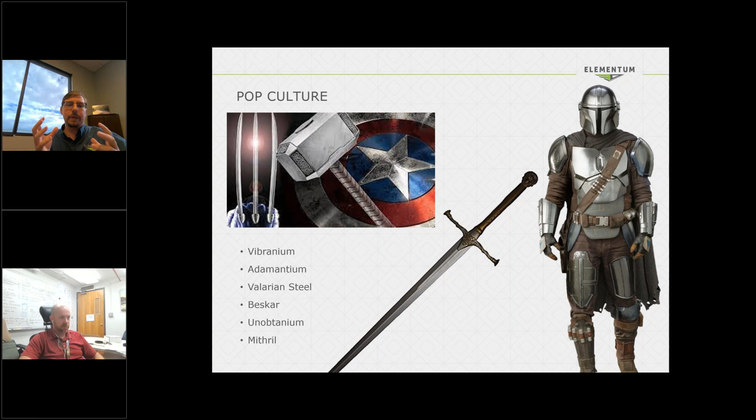And so what is it that really captures the human imagination around these materials, and what helps us define the different stages of human development as part of those materials? If we talk in history, we look back and we say, okay, we have the Stone Age, then the Bronze Age, then the Iron Age, now maybe the Silicon Age that we're in now. Why is it materials really define the different stages of human advancement?

And what is it about that causes, I think, excitement in humans? Even in science, we hear about some of these mythical materials like graphene that's 100 times stronger than steel, and carbon nanotubes that have a higher tensile strength than anything that exists. Why is it then that we don't have buildings made of these materials? Why is it that we don't make suits of armor that are completely impenetrable?

And it really comes down to, if you can't make it into something useful, it doesn't really matter. If we go back to those pop culture references, there isn't a pop culture reference that really talks about a material as just being a material. They always talk about its properties and then where you use it. So, adamantium, it's the claws that are completely indestructible, that are infused with his bones. Or the Valyrian steel is stronger and can cut other swords in half. It talks about the use and the application space.

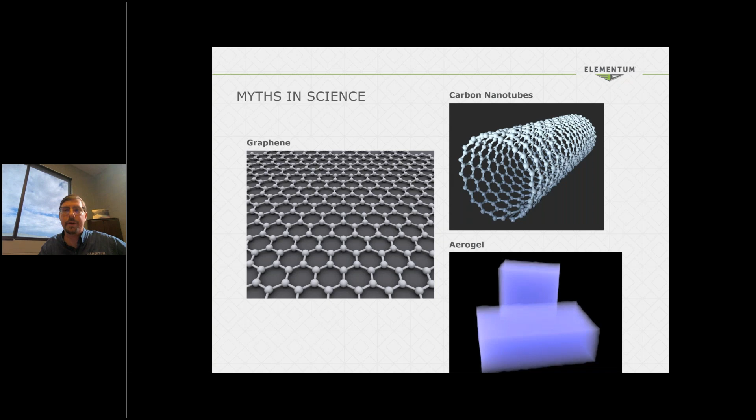And there's really a difference between just being able to address new materials and talk about great new properties in a lab setting versus actually having impact on the culture and on humans and what we do. And that's really where I'm excited about additive manufacturing. Additive manufacturing in particular, I think, is bridging that gap, hence the name of the series that we do here, of bridging the gap between pure developmental science and real usable applications.

Where you can actually take a component made of some brand new material that has properties that have never been seen before, and you can put it into practice in a shorter period of time, and in reality, way faster than it's ever existed before. And that's what personally gets me excited about new materials and additive manufacturing in particular.

When I was doing research in graduate school and really developing new materials there, it was so hard to control and to transfer that knowledge into something that would be useful for industry. Whereas now we're going from a development concept of a new material into production on a component within 2 years, which is an incredibly fast timeline compared to what has happened within human existence in the past. And that's really where I get excited about the new materials that we're looking at.

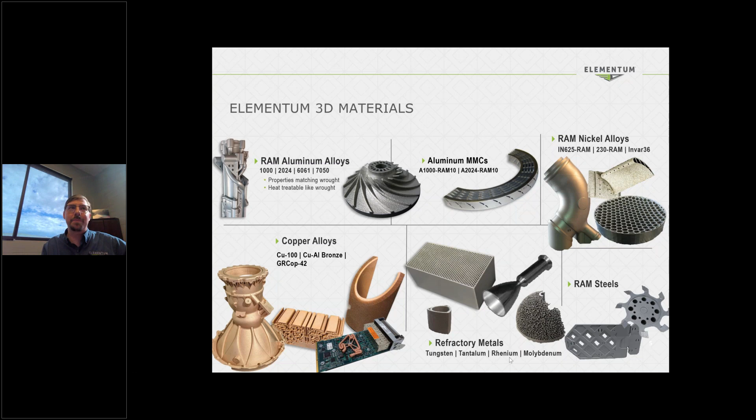And then even in the refractory materials, like rhenium. We've been printing rhenium recently, which if you had told me that we'd be making components out of rhenium and then hot fire testing them within 6 months, if you had told me that 10 years ago, I would have probably told you you're crazy. And so I think that's the really exciting part about additive manufacturing and the new materials that we're bringing to the table. And that's why I'm really excited to introduce the speakers that we have here today.

A little bit about Elementum's relationship with these different people. Elementum has a lot of relationships across the entire industry, but certainly we've been working with these gentlemen quite a bit. Jamie, we've been working with 6K products now for only about 6 months, and really working on different things, and the rhenium that we've been printing was with them, if you saw that LinkedIn post. So excited about introducing Jamie. Doug Hofmann was actually our first customer at Elementum back about 8.5 years ago. So that was a long time ago at JPL.

And Tim Smith, certainly I think very little introduction is necessary for Tim Smith. I think a lot of us understand the impact of GRX 810 and the excitement in the industry for new high temperature nickel superalloys. So with that, I'm going to go ahead and hand things off to Jamie, and he'll jump in and tell you about the great new materials that they have going on there at 6K. So Jamie, let me hand over the presentation to you.

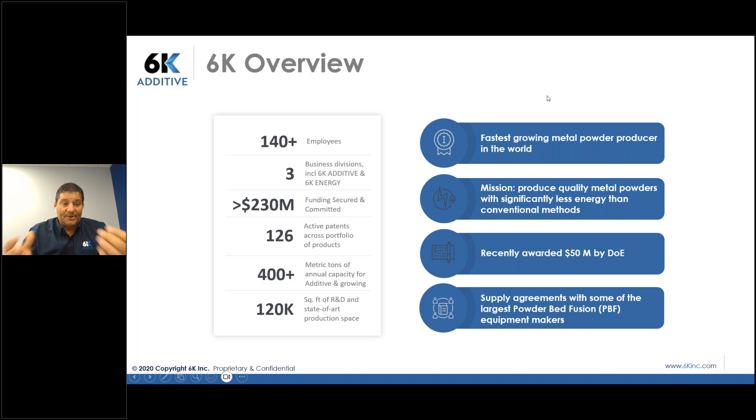Just a little bit about 6K Additive in general. We are part of a larger company called 6K Incorporated. We generally have two divisions that most folks know about. That's the additive, and then we also have the other group, which is the energy group, which makes battery materials. Of course, this is focused a little more on the additive group, so I'll focus a little more on that. We are about 140 employees. We actually have 4 locations now, with our global center of manufacturing being close to Pittsburgh, Pennsylvania. As a group, we have about 126 active patents.

And I think one of the things is, besides the manufacturing portion of what we do, we also have an R&D center of excellence, which is located in North Andover, which is part of the 6K Incorporated group. So besides leveraging our own manufacturing expertise, we can also leverage a lot of R&D work from the North Andover group, which includes not only design of materials and the processes, but also design of equipment to facilitate those processes.

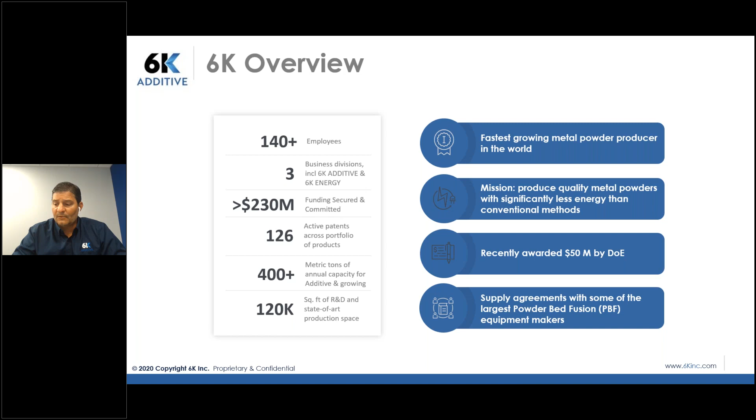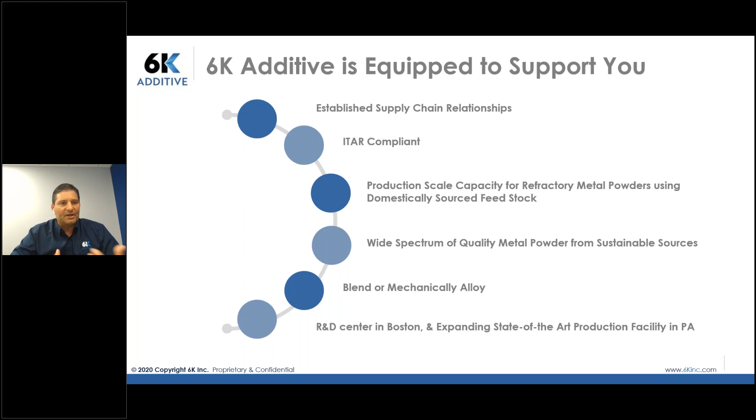We are a full service powder supplier. I think the best way to describe us is probably the fourth bullet down, which is a wide spectrum of quality metal powders from sustainable sources. But we also have that R&D arm, and there's a variety of different ways that we can approach making these materials.

The core technology that facilitates everything that we've built around these manufacturing processes is the UniMelt plasma system itself. It's a microwave-based plasma system, which I'll talk about in the next couple of slides, of why it's unique. But I think it's always very important to understand, and there's probably a large group of people on here that have heard it before, but I don't think everybody always completely understands. With our plasma, we're not doing any atomization. We are simply doing spheroidization.

So we're simply doing the step that facilitates a morphology of powder that allows these things to be used in additive manufacturing. Now, there are some benefits that come along with that, in that we can improve cleanliness, particularly interstitials for things like gases. But the key thing is that we can take a lot of different types of materials and input it through the plasma and melt each of those individual particles and allow them to become spherical and give us the properties that are important to most of the additive manufacturing machines when it comes to the utilization of powder. So we call it a volume in, volume out process.

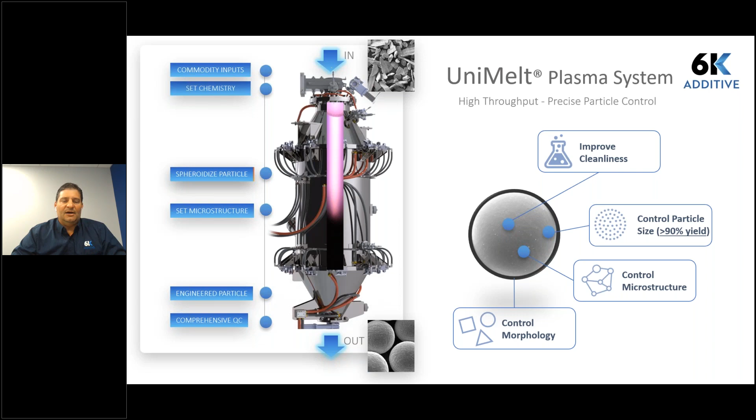Very important to understand that in this process, in that core process, we're not doing any size change. It's only shape change. The microwave plasma itself is sort of unique in that it is a little bit different than conventional inductively coupled plasmas or some of the other technologies that exist out there, because it's actually a little bit cooler plasma, and that affords us a couple of benefits. So we say the core of our temperature is, and it's the rub on our name, 6K. It's 6,000 Kelvin is what the core plasma temperature is, and that's a little cooler than what some plasmas run.

But it also is a much larger density of plasma and a much larger working zone in the plasma itself. So a few things that affords us. It's highly stable. It has a great temperature uniformity throughout the plasma itself, from the core outward, and it also is highly energy efficient. So the energy that you put into the plasma system, the microwave couples, and the energy from the microwave is about 85% efficient to the plasma.

What all that does is it gives us a really nice processing zone for a wide variety of materials. So we have a pretty broad-based product offering, and it's facilitated by the fact that this microwave plasma is so controllable and that we can create a nice material processing zone within the system itself.

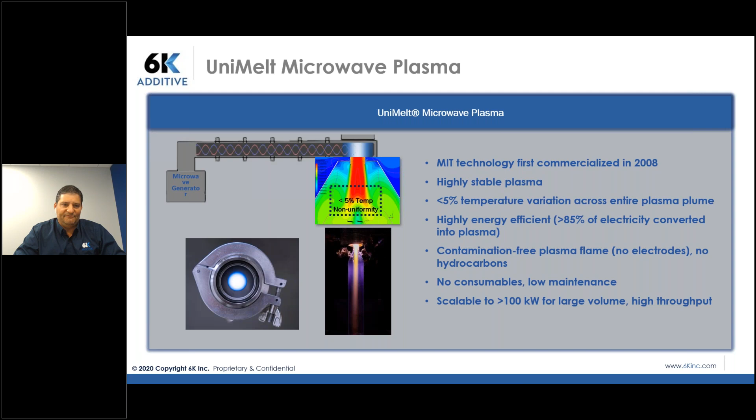And we can be successful with all of these because of that control that we have over the microwave plasma system. And there's a few different ways to control it. We can control the power, and we control the space where we actually inject the material into the plasma. But what it allows us is, again, anywhere from a very low melting temperature material all the way up to a very high melting temperature material to be processed through this system. So again, when you're thinking about material design or alloy design, this gives you some idea of the wide range of materials that we can process on our system.

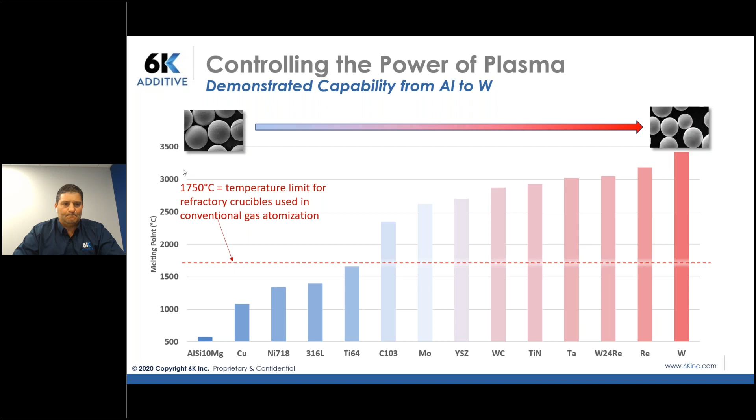And so some of our core focus is mechanically milled, where we're taking particulate materials and making them the right volume via mechanical milling. We can take irregular powders, whether it's from some other atomization technique or chemically reduced powders or even used powders. Also we have the ability to do hydride convertible solids. You'll see a lot of that. So for tantalum and tungsten and niobium based alloys, we can do that.

We also have the ability to mechanically alloy this. So this is where a lot of the design stuff can really come into play, where you can take a look at what are things that we could put together that might not be able to be conventionally put together, and kind of agglomerate them together and then spheroidize them in the UniMelt reactor. But any of those feedstocks are good to end up with a spherical material for additive manufacturing.

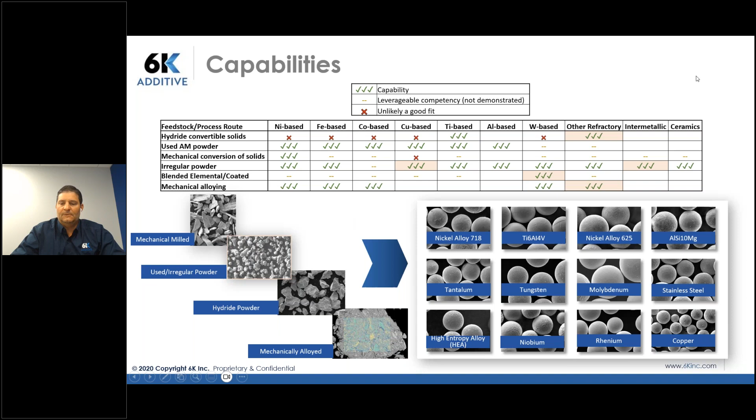So a little bit of the focus in the second half of this presentation is just the refractory metals in particular. I think this is a space that's gaining a lot of momentum, and I think we all believe that additive manufacturing is a really good space for this. You have these very high melting temperature alloys, they're a little more dense. And the characteristics that make them so good for some of the applications we're looking at also make them very difficult to handle, not only in production of the materials themselves, but also the manufacturing techniques. So additive manufacturing and the Unimelt process kind of bridge that gap to unlock the potential of these materials and really get them into parts, into applications, into wider spread applications.

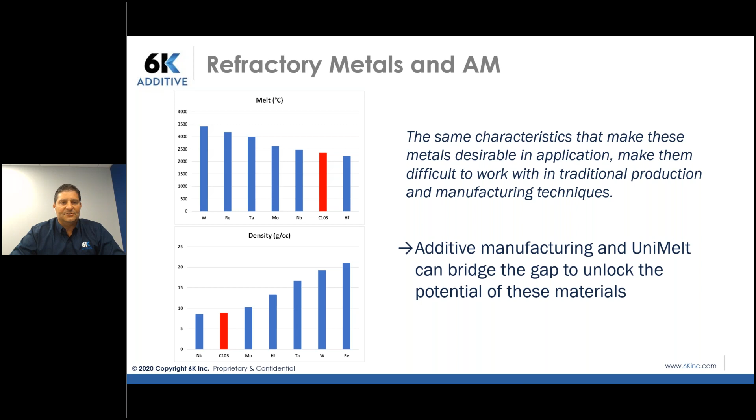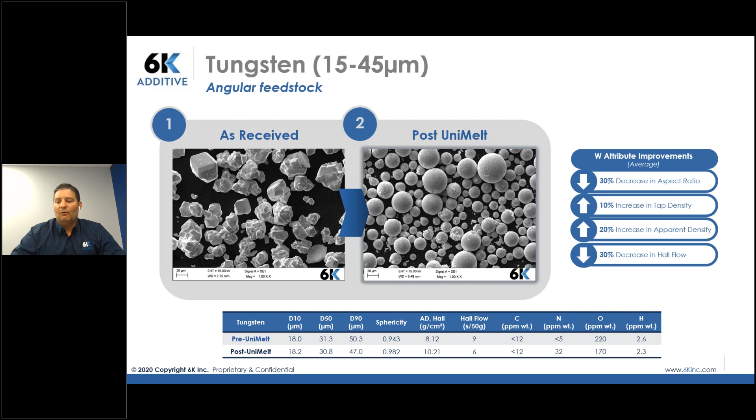Some examples of materials that we produce on a commercial basis now. We actually make tungsten. I think it's probably the most commonly printed refractory metal. We see the most people working with it out in the industry now. It's probably the most readily available in general, but there's a lot of different particulate feedstocks that you can find in tungsten. And we have the ability to sphericize that and get it to a place where it's useful for additive manufacturing - correcting all the key components, the flow, the densities, to make it useful in most additive manufacturing applications.

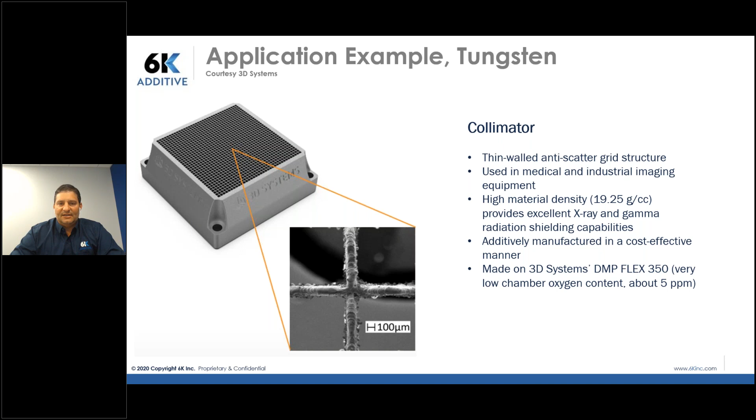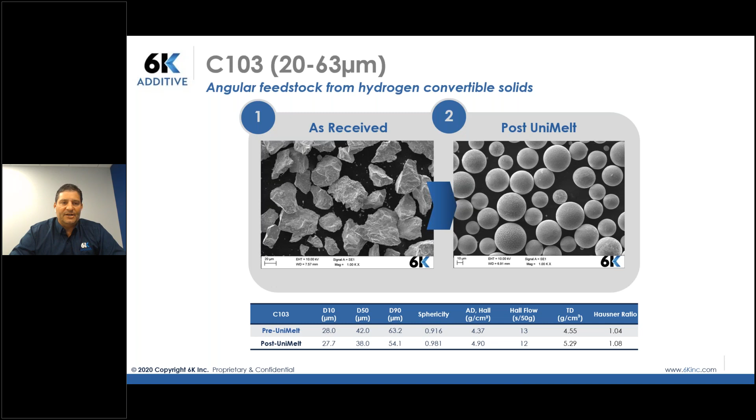And again, I use these as examples, but I always like to say, we like to design and are very good at designing the processes to make the materials. But we're always looking for people with ideas of what we need to make, and then we can figure out how to make it and get it into some of those applications.

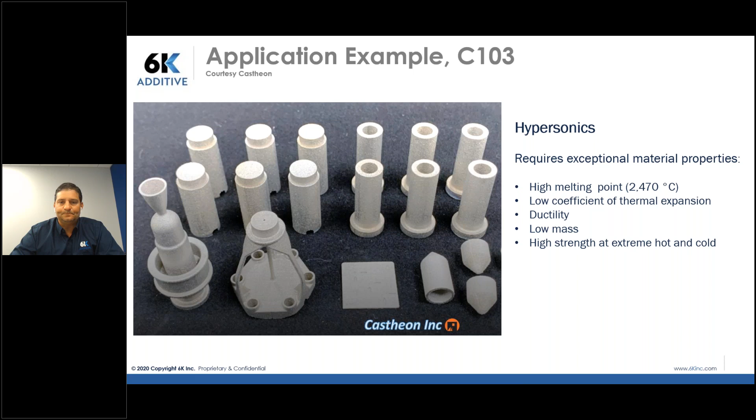The last thing I would be remiss in talking about is, I think everything we do at 6K Additive, we think about the environmental aspects of things. And I say that, and we've done a life cycle assessment on our process, and the improvements over some traditional processes. But I think even beyond that, we like to talk, particularly in the AM world, about making sure we keep this eye towards sustainability and towards the environment.

6K Additive looks very closely at being able to help the end users recycle all of the waste streams of this. It actually ends up becoming a nice circular economy, because whether it's spent powder or failed parts or builds, we know those are all issues that not only have cost implications, but also implications to the total sustainability of the additive manufacturing process. So in the development of all these alloys and all these different techniques, we like to think about ways to try to bring back the materials that can't be used in the processes, and make sure we have a place for them to go, and that they don't just end up in landfills or worse yet, sitting on shelves for decades, becoming somebody else's problem in the future.

So with that, I'll turn it back to Jacob to move the webinar along, and I'll be happy to field questions at the end of the webinar.

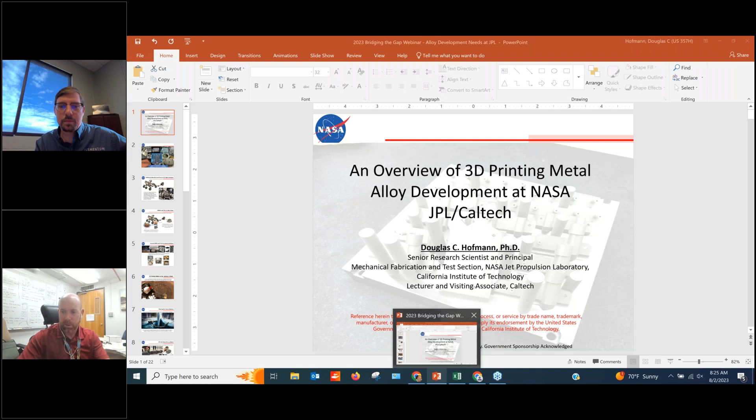I'm going to be talking a bit about the 3D printing alloy development at JPL. Everything I'm talking about is actually from before the pandemic, when we were doing a lot of this work. We actually have several years worth of additional work that we're kind of chewing through, but this gives you a snapshot in time from what we were doing up until the beginning of the pandemic.

I think additive manufacturing is playing a significant role in flight projects and R&D efforts at JPL. This is a picture giving a snapshot of some of the things we are working on, a wide variety of applications. As you probably know, the Jet Propulsion Laboratory is NASA's federally funded research and development center with a focus on robotic space exploration. So we have a lot of very unique missions and one-off applications for materials in extreme environments, and you can see that flow down into the kind of parts we're interested in manufacturing.

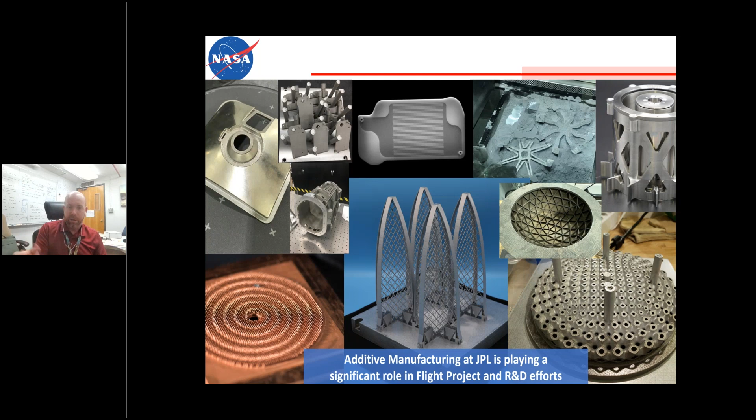So our additive manufacturing group is joined with our materials development group. We have a group called the Materials Development and Additive Manufacturing Group that focuses on conventional metallurgy and alloy development, computational thermodynamics, as well as both metal and polymer additive manufacturing, all with the objective of being able to produce parts to enable extreme environment exploration.

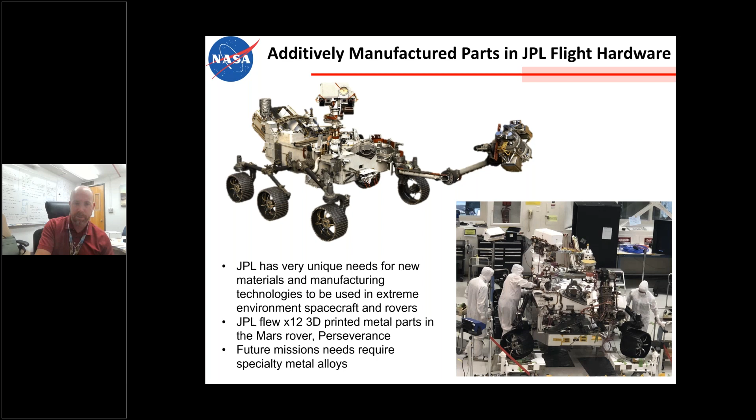I should mention that we do have some flight heritage with metal 3D printed parts, so we've got some very unique challenges. This is our Mars rover Perseverance, and we flew 12 3D printed parts on Perseverance. I'll show those in the next couple slides. Here's the CAD model of it, as well as a picture I took of it being assembled. This will give you an example of the kind of applications we have for advanced materials and additive manufacturing.

The two infusion points we had on Perseverance were in the MOXIE experiment and in the PIXL instrument, which you can see here on the rover. The MOXIE experiment, as you may know, was the first demonstration of planetary in situ resource utilization, or ISRU. It was a tech demo payload to demonstrate the production of oxygen from the CO2 atmosphere on Mars. The preheater assembly in MOXIE was a pretty complicated part with internal features that we decided, late stage, was a good infusion point for metal 3D printing.

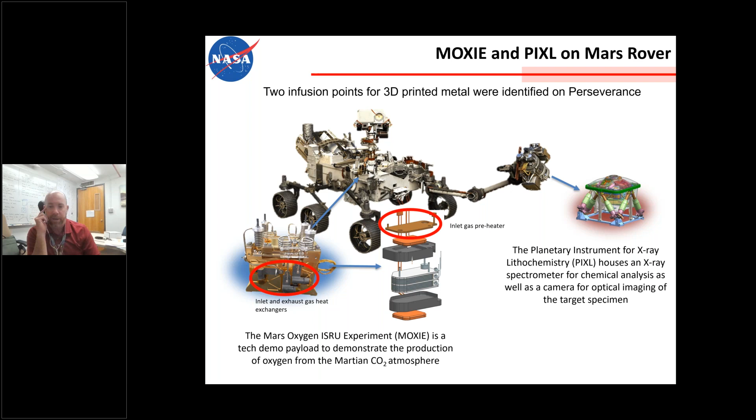PIXL is a spectrometer that you see on the right. In this case, we were using additive manufacturing to produce a pretty complex housing that went over the PIXL instrument. So here are images of the actual flight hardware we produced for MOXIE and for PIXL.

MOXIE was sort of an internally generated part that was printed on our own EOS M290 out of Inconel 625. There were several parts of this preheater assembly that you can see printed here. One part in particular had internal cavities, which you can see with the CT scan on the right. So this part was sort of a pathfinder for being able to produce flight hardware from design all the way through qualification and infusion.

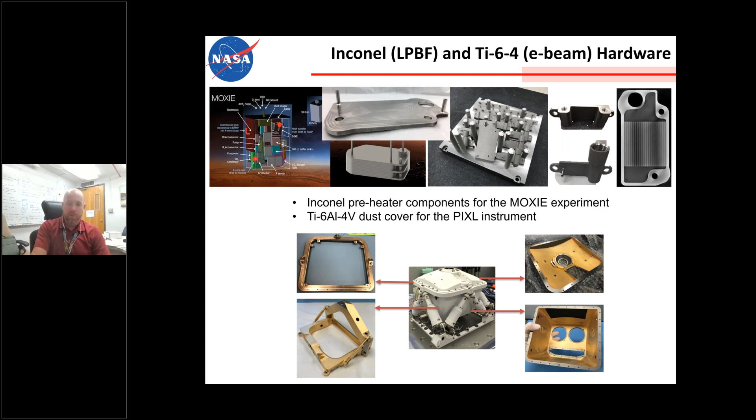The part at the bottom is the dust cover for PIXL, which is a very complex part to manufacture out of sheet metal. It has this hollow rim that goes around it, and then a thin-walled titanium cover that goes on the instrument. This was printed in E-beam out of Ti 6-4, chemically etched and painted before it was installed on the rover. So two different applications for additive, both really demonstrating the utility of additive for flight hardware.

And then I think this picture is just, I guess, my favorite. This is the 3D printed Ti 6-4 dust cover for PIXL on the surface of Mars on the Perseverance rover.

So if you ever see a picture of the Perseverance rover, you've got that big flat white panel right there. You can point that out to people and say that is a 3D printed part sitting on another planet. So it's kind of a big success from our infusion, and it demonstrates this TRL9 use of additive manufacturing. Of course, this isn't the end of the story.

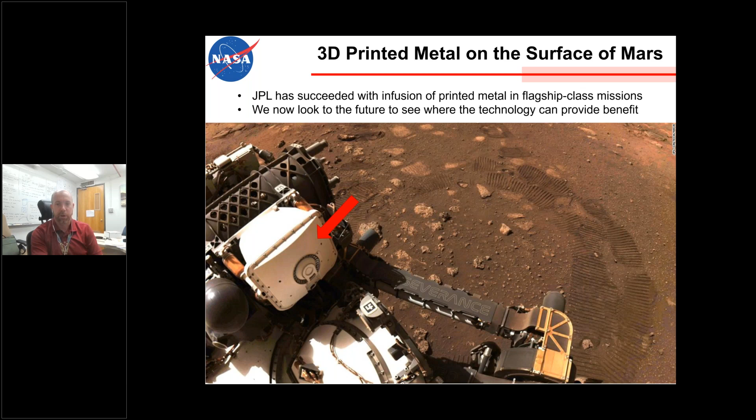This was sort of our first infusion of metal 3D printing all the way through a flight project, and hopefully it'll be one of many in the future, including some that involve new materials we are developing with ourselves and our partners. So if you look at some of our mission concepts in the future, these are missions that haven't flown yet, but hopefully will fly someday.

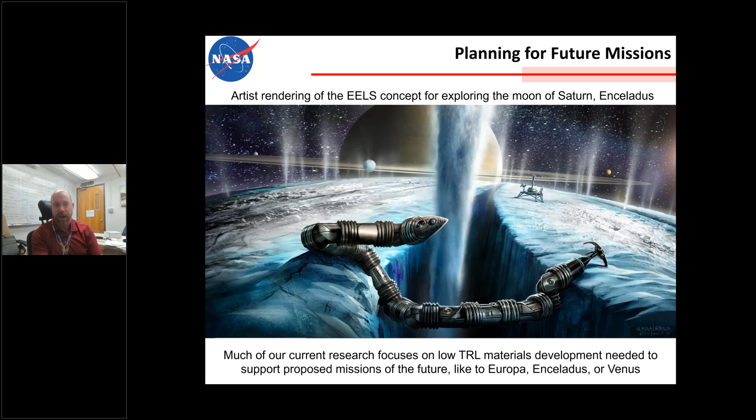But these are the kinds of environments we are dealing with at JPL. One day we're developing parts for Mars. The next it's a lunar rover. The next we're developing prototypes for a moon of Saturn or Jupiter. So this gives you an idea of why we have to develop new materials and manufacturing technologies to access these extreme environments.

So here's just a look at the EELS rover and some of the prototypes that have been built, where we have been using additive manufacturing for prototyping, not only for some of the joints, but we've even 3D printed the screws on the EELS rover for going through snow using our Formlabs 3D printer.

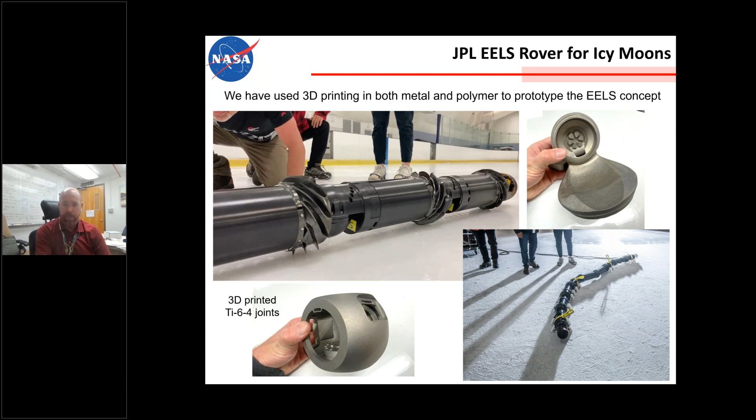These are Ti-6-4 parts that are printed on our M290. So you see that we work on both sides of the spectrum, from flight applications down to prototyping, and we work heavily with our robotics group.

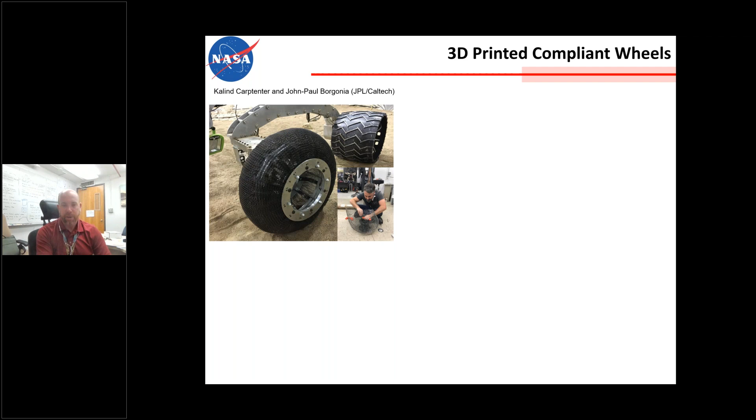Mobility for rovers is an area where we see a lot of promise for additive manufacturing. So we see here some compliant wheels for rovers. We've been exploring how to use additive manufacturing for innovative mobility systems.

This is a cool example of a compliant wheel that was 3D printed in a single piece using laser powder bed fusion. It's printed in a stack, and then you remove the supports, compress the stack to pop open the mesh of the wheel, bolt it together, and you've got yourself a compliant wheel that can be made out of any material that you can get into a laser powder bed fusion printer. So this gives us new and interesting capabilities for mobility.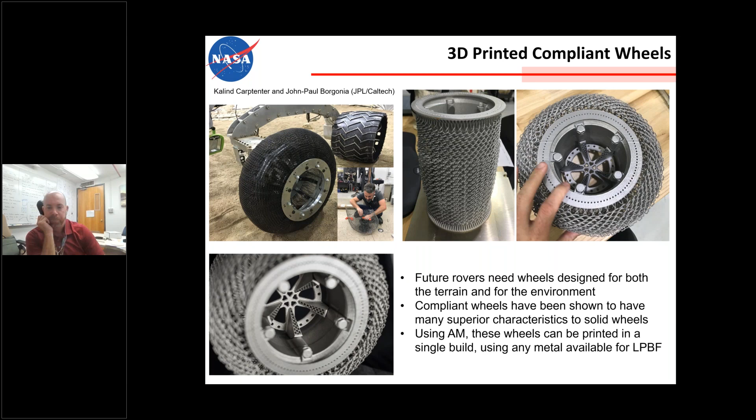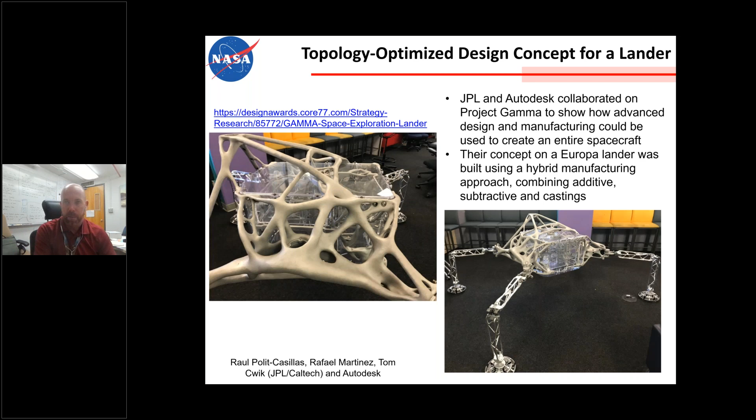This was sort of a pathfinder for where you could take this technology if you are agnostic about the manufacturing route, but you look at the design enabled by computational methods, and then apply manufacturing constraints like additive, casting, and machining. What can you do in terms of spacecraft design? This was a really cool pathfinder part that hopefully will flow into some of our future missions as we try to reduce the mass, which allows us to fly similar missions in smaller launch vehicles.

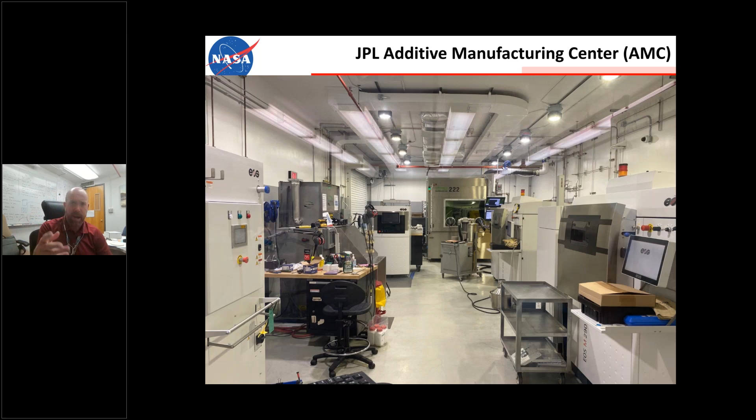This has been a multi-year effort to stand this up. In the center, we also have alloy development capabilities with our multi-hopper DED and our M100. We partner with dozens of universities, national labs, and commercial companies to do further development.

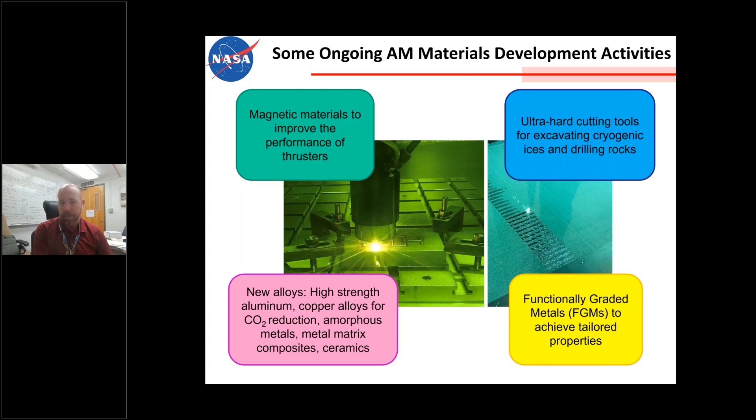Some of the ongoing additive materials activities we have at JPL: we do magnetic materials for thrusters, high strength aluminum alloys, copper alloys for CO2 reduction. We've printed amorphous metals, metal matrix composites, ceramics, and I'll show some ultra hard cutting tools we've looked at for excavating cryogenic ices. We've also been working for over a dozen years now on functionally graded metals, where we've identified a lot of beneficial applications, but it's very difficult to infuse those into missions because of the mixed metal compositions.

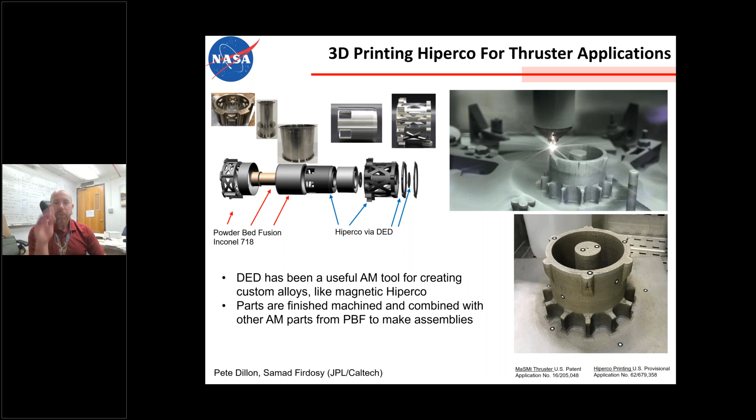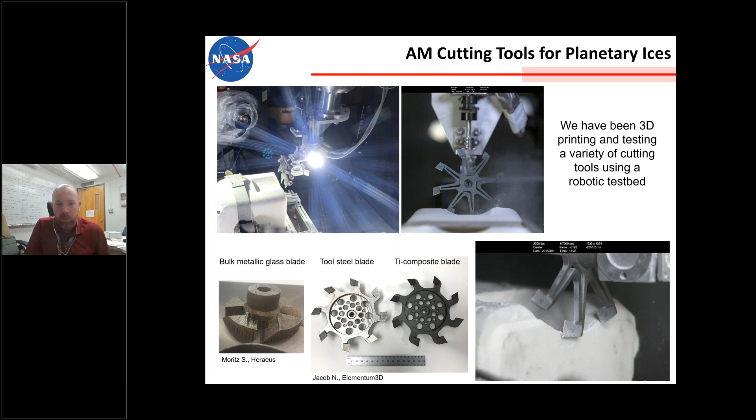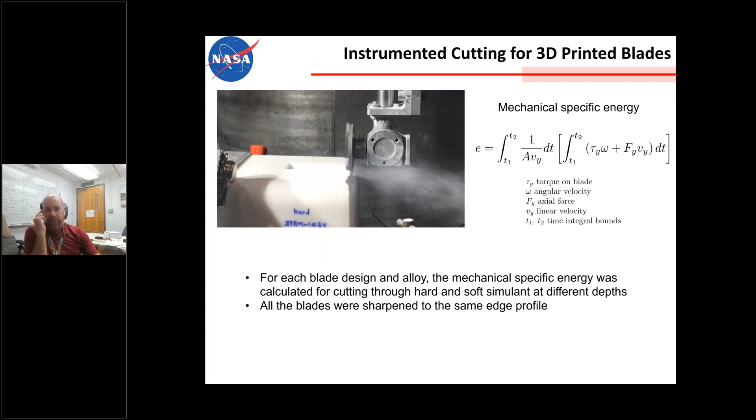What we're doing here, as you see in the video on this next slide, is trenching through some ice simulant using an amorphous metal cutting tool. We're measuring the mechanical specific energy of these cutting tools and looking at the cutting performance as a function of their design and the material they're manufactured out of.

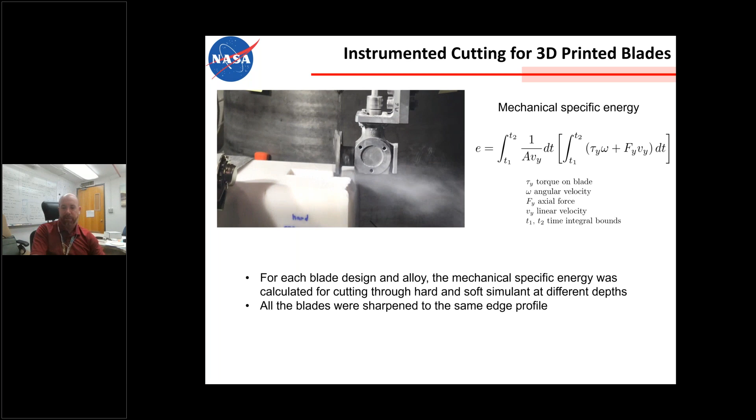This really gave us a chance to fix the design and then look at the effect of material on cutting performance. Here you can see 5 different cutting tools made with various materials: Inconel metal matrix composites from Elementum, Ti-6-4, maraging steel, tool steel from Elementum, and 316. We have measurements of cutting performance in our simulant for all of these cutting tools, which gave us a good idea about how to drive this technology further.

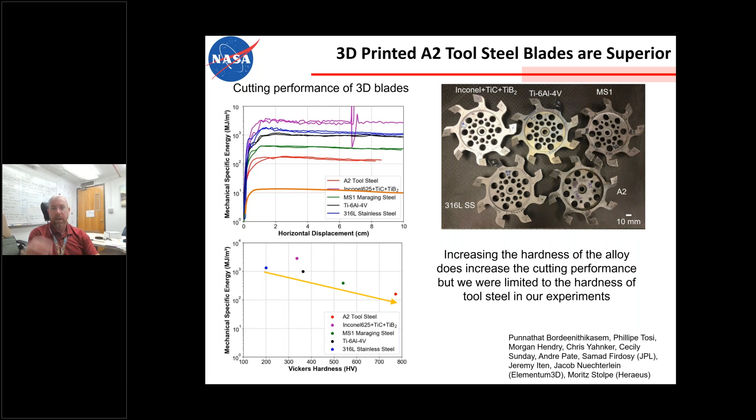Some of the alloy development things we're really interested in is developing metal matrix composites. Here are 3 examples: there's in situ, where you melt phases together and form dendritic phases that solidify from the liquid; hybrid composites, where you partially dissolve particles, reprecipitate them, and you've got 3 phases present; and ex situ composites, where you have insoluble phases inside of a matrix.

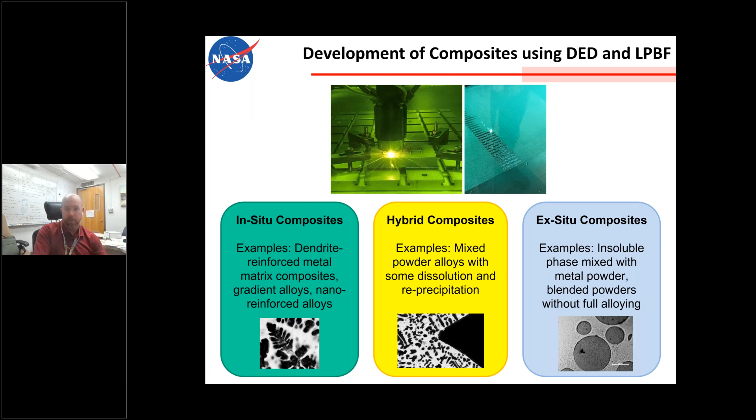These can all be printed both with powder bed fusion and with DED for various applications. We wanted to make this cutting tool out of a titanium carbide metal matrix composite in Ti-6-4. Part of doing alloy development is trying to learn parameters, so we worked with Elementum to develop Ti-carbide loaded Ti-6-4, and it didn't work very well in powder bed fusion with high loadings of titanium carbide, which we were hoping to get at 40-50% loadings.

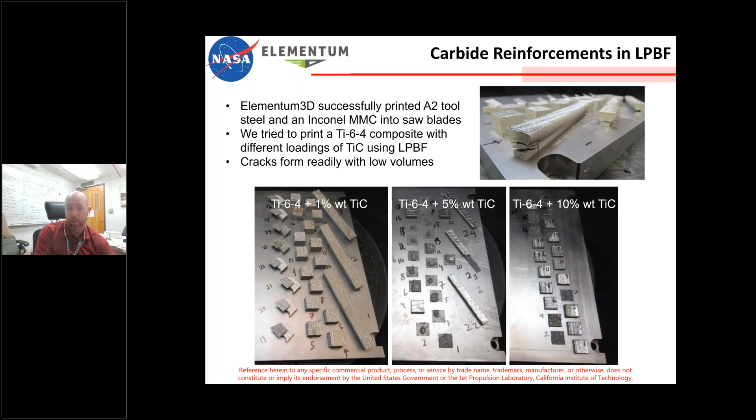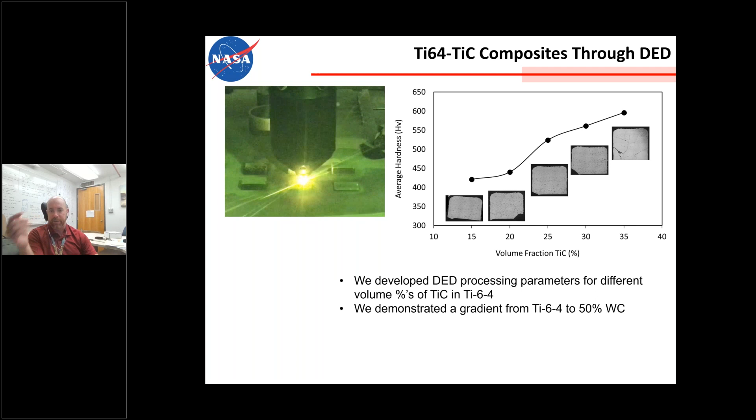So, this is part of the process of doing alloy development: figuring out what works and what doesn't work based on the available parameters. So we switched to DED to be able to try to do these Ti-carbide loaded Ti parts. We're able to get up to about 30% loading of Ti-carbide before we start getting significant cracks in the Ti-6-4. So we're able to do functionally graded Ti to Ti-carbide alloys.

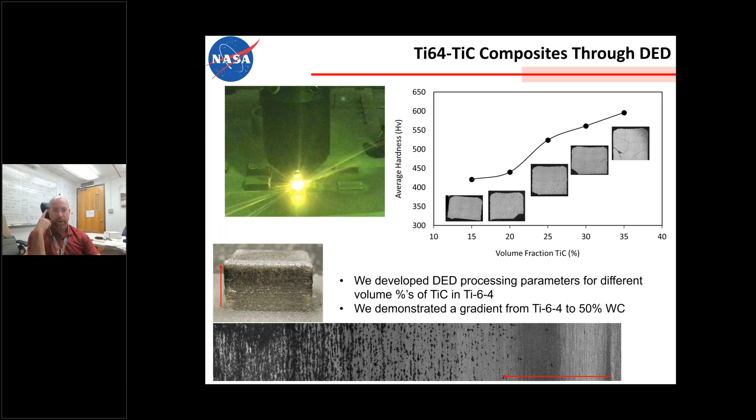And with DED, you're able to control the melt pool to partially or fully dissolve these Ti-carbide particles to create metal matrix composites with really innovative microstructures. So here you see some micrographs of partially dissolved and reprecipitated titanium carbide in Ti-6-4 parts. So this is kind of one of the most exciting things that we have developed with DED

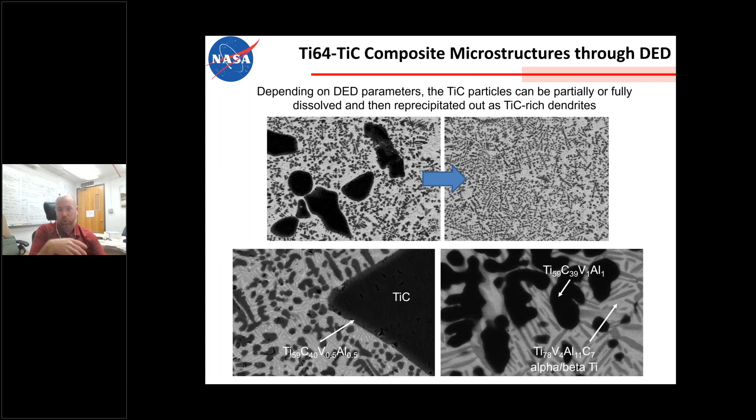multi-material metal matrix composites that combine titanium and titanium carbide in functionally graded ways so that you can produce ultra hard titanium alloys as well as very high melting temperature titanium alloys that are loaded with Ti carbide.

So one of the things we demonstrated is we made cutting tool inserts out of these Ti carbide parts, and then we did the same experiments where we did cutting performance using these inserts to demonstrate that we could actually develop Ti carbide metal matrix composites that have pretty excellent cutting performance compared to tungsten carbide, which was really surprising to us. And the advantage of using additive is that you don't have to make inserts. You can print these directly on your cutting tools so that you don't have to worry about bolts, bonds, or brazes.

So, this is one of many of the areas that we're working on where we're trying to use alloy development to get us a new capability that hasn't previously existed. And the reason we're doing it is because our unique missions require that we go to extreme environments and innovate with the design and operations of our spacecraft and rovers.

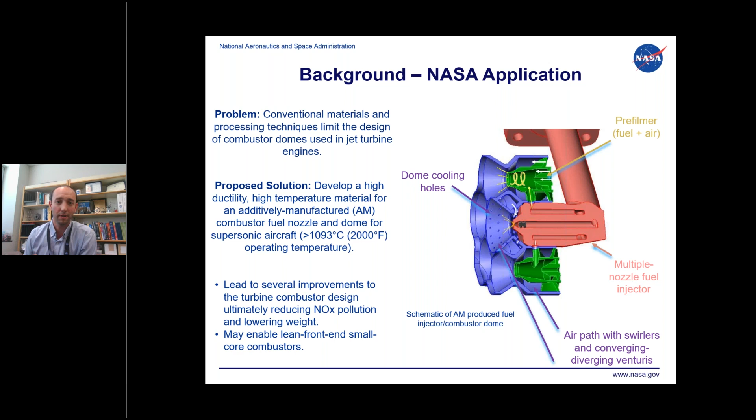When you look at the alloy systems that are available for temperatures of 1100 C or higher, there really aren't that many material systems you can tap into. Obviously refractory metals, you have your composites and CMCs, and then some other nickel-based superalloys, especially your gamma prime strengthened alloys. And a lot of these really have issues: either they're not easily 3D printed, or they have really troublesome oxidation properties like refractory alloys. And since we weren't going to be able to pick up a coating project on the side for something like refractory alloys, we decided to not go with those. Instead, we started exploring this other class of alloy system called oxide dispersion strengthened alloys.

In fact, back in the 70s, 80s, 90s, a lot of research was done even here at NASA Glenn on alloy development for oxide dispersion strengthened alloys. And really what an oxide dispersion strengthened alloy is: if you can incorporate nanoscale oxides through your bulk metallic part, evenly dispersed, a multitude of high temperature properties get significantly improved. Strength, creep, oxidation, and things like that.

The issue though is how do you get those nanoscale oxides into your metal component? You can imagine with more conventional cast processes, once that metal melts, the oxides immediately float to the top, agglomerate, and are not equally dispersed in your part anymore. And so in the past, they would do this very expensive mechanical alloying step and hot compaction, and then machining to finally get a finished product, and it ended up being too economically costly to really see ODS alloys take off within industry.

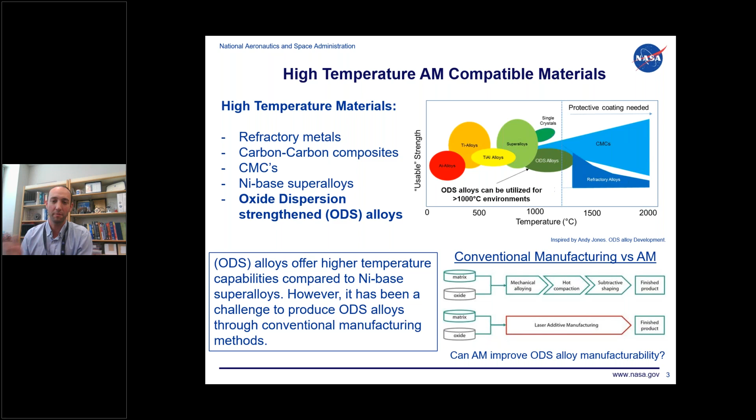However, we want to take a look at oxide dispersion strengthened alloys again with this new manufacturing technique of laser additive at our disposal, and see if we can bypass these expensive processes of the past and make ODS alloys just by printing them. The issue though is always how do you get your nanoscale oxides with your metallic powder into your 3D printer? And what we came up with was using this new high energy mixing technique called resonant acoustic mixing.

What we can do is take the metal powder, which in this case, starting our research, was nickel, cobalt, chrome, equiatomic. It's a very amenable alloy to 3D print and creates a really nice foundation of this ODS project moving forward. So we took this nickel, cobalt, chrome powder and these nanoscale yttria particles, and we would mix it in these resonant acoustic mixers. And what happened was those nanoscale oxides would adhere and coat the metallic nickel, cobalt, chrome powder.

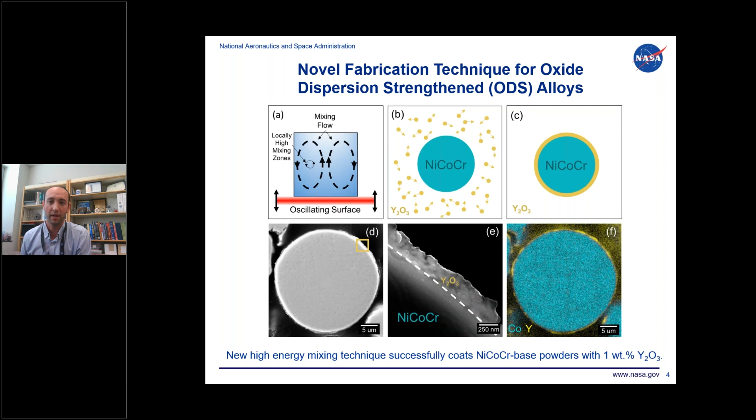What was really nice was that this process doesn't heavily deform the metal powder. With mechanical alloying, you take very spherical powder, and by the time you're done, it's almost like flakes or plates, and they don't flow very well. And when you try to 3D print that type of powder, you really introduce a lot of defects into the part because it's not a very spherical powder for 3D printing.

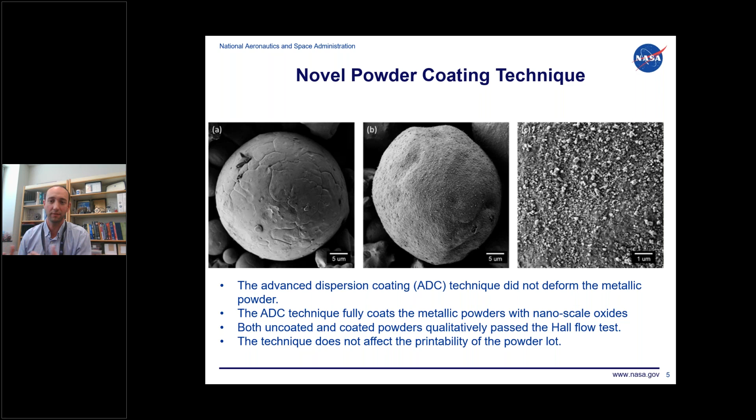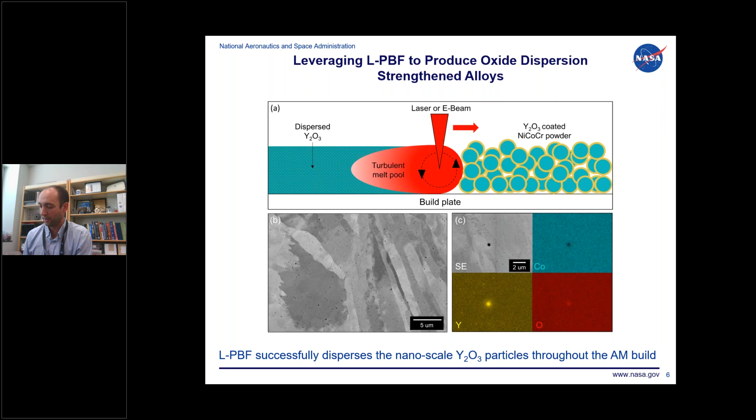In the SEM image on the lower left here, you can hopefully pick up these really fine black dots in the micrograph there. Those are not pores or porosity, those are actually the nanoscale oxides evenly dispersed into your metal component. And you can see it doesn't really prefer grain boundaries or other locations. It really does appear to be evenly and randomly dispersed throughout the metal part. And so we proved to ourselves at this point that we can make ODS alloys with this coating step using 3D printing processes without mechanical alloying.

That's about right when the pandemic started, and we all got sent home for a while. And so my colleague Chris Kantzos and I decided, we have a lot of these thermodynamic modeling tools at our disposal. We know we can make nickel, cobalt, chrome ODS, but there's nothing too special about that composition in terms of really optimizing high temperature properties. And so we wanted to take that foundational nickel, cobalt, chrome composition and alloy it to maximize its high temperature properties.

And so we set out some goals for our modeling process, which were: maximize solid solution strengthening while maintaining it from operating temperature to melting temperature to room temperature, adding grain boundary carbides for strength, all while maintaining printability of the alloy composition.

And so what we find is that, loose rule of thumb is that if your range between the liquidus and solidus temperatures, let's say, goes above 100 degrees Celsius, you're more likely to run into 3D printing issues like microcracking and things like that. And so we wanted to keep a narrow freezing range, and then obviously avoid TCPs or any intermetallic grains that might form on grain boundaries that would be detrimental. And so we ran a ton of simulations and really came to this optimized composition that we're calling GRX-810, as you see below.

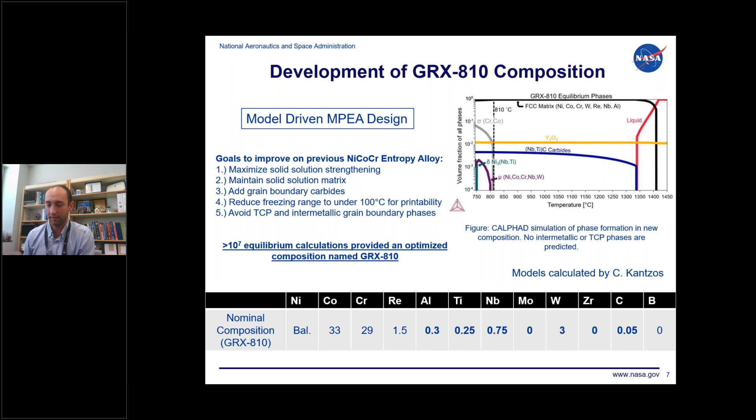We were able to take that powder, successfully print it, and start doing some characterization of the microstructure. Some notable things that we found was we do see carbon segregation at the interface between the oxide and the metal matrix. We aren't sure if that really has any additional benefit to the properties, but it was an interesting observation that we could see with some high resolution TEM analysis. We also see the presence of niobium titanium rich carbides, which are those MC carbides. We wanted to strengthen grain boundaries, and so the simulations were successful there.

And we also see segregation of chromium and tungsten and rhenium at the grain boundaries with this alloy. So we think that might help also strengthen and improve the oxidation properties of these grain boundaries. And then just looking at the atomic lattice, we show there isn't any elemental ordering or segregation. We do have a true solid solution matrix with this alloy.

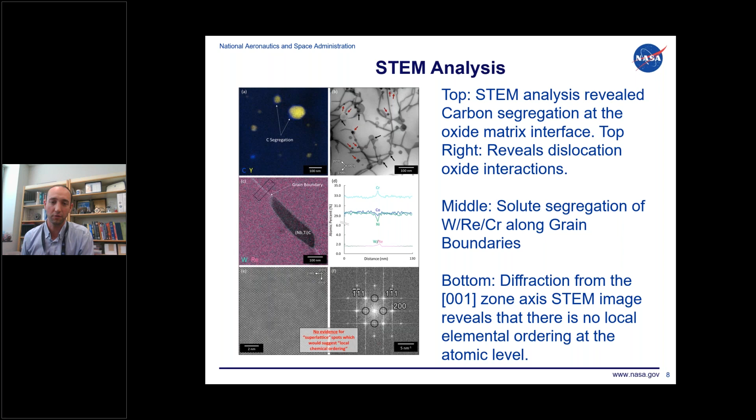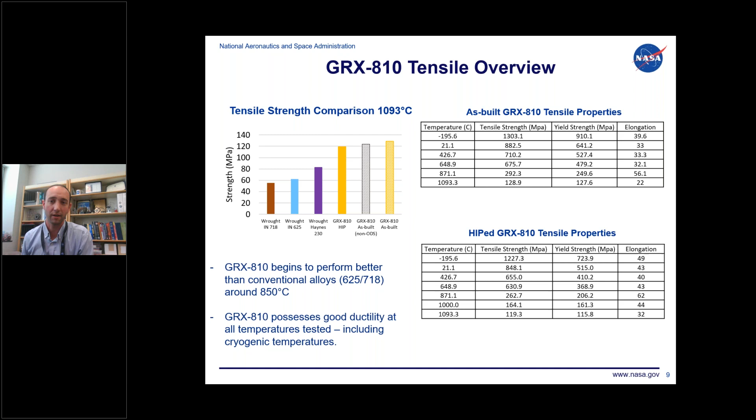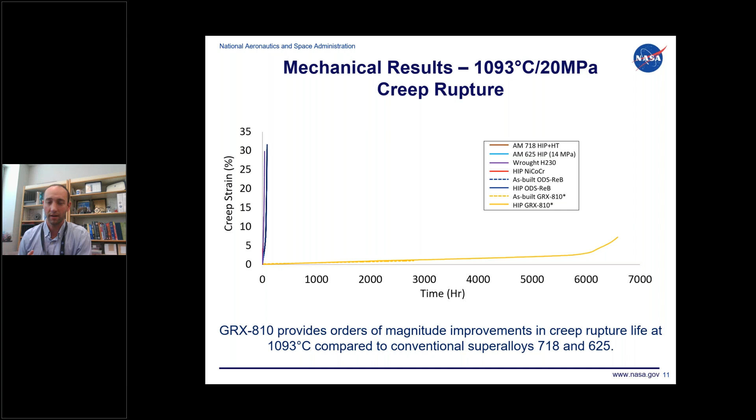If we look at time to get to 1% strain, the amount of operating time is really reduced: 2 hours for 718, 5 hours for Haynes 230, and even our original ODS was only 9 hours.

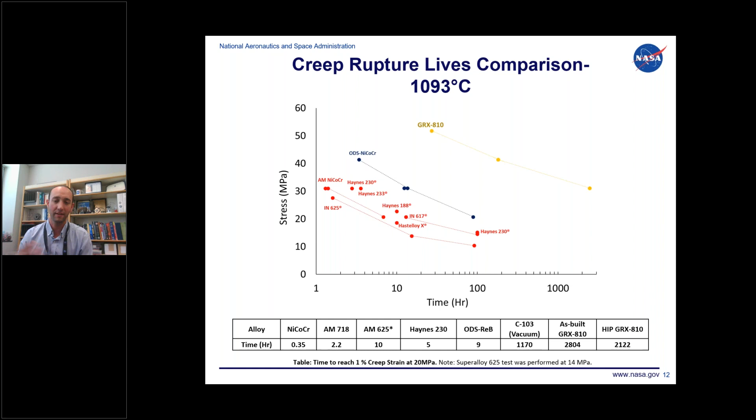But the as-built GRX-810 reached 2,800 hours, and the HIP version 2,100 hours. Those numbers are actually better than C103 in a high vacuum, which was 1,100 hours. Our hope is that GRX-810 can replace 718 and 625 in high temperature applications, and maybe even replace C103 in some lower temperature applications, just because of how costly C103 is.

We started to explore oxidation, comparing GRX-810 to 718. At 1100C, you see about a 2x improvement between the two alloys. But at 1200C, you see a significant divergence in their oxidation properties. 718 failed after three 1-hour thermal cycles at 1200C, basically crumbling into a pile of oxides, whereas GRX-810, though losing some oxide, maintains its structure and strength. We were able to extend that test out to 100 hours.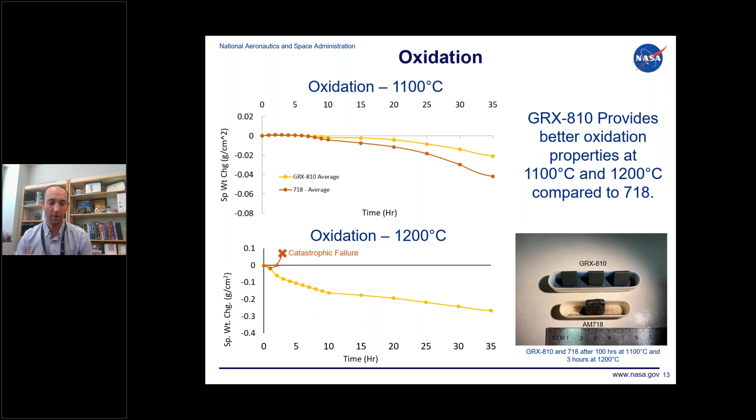We've recently been performing hot fire tests on GRX-810 injectors and nozzles at the Marshall Space Flight Center, and we'll hopefully have those results published soon. So far the tests have been very successful.

I think this is a great case study of how additive can infuse new materials much more quickly than conventional processes. We started printing GRX-810 for the first time less than two years ago, and we're already doing component hot fire tests at Marshall. I don't think you'd be able to achieve that type of rapid development with any other manufacturing process.

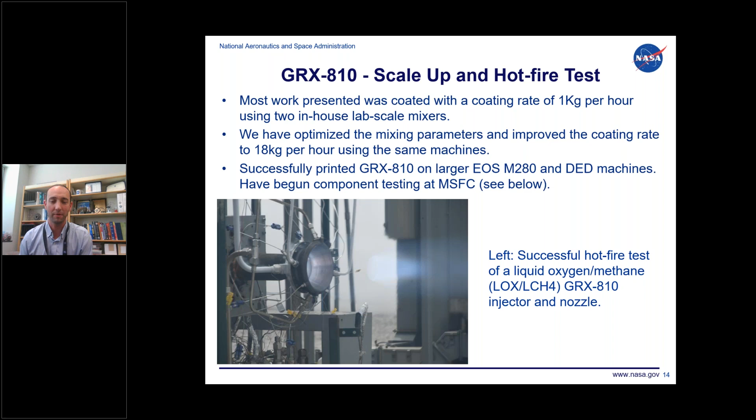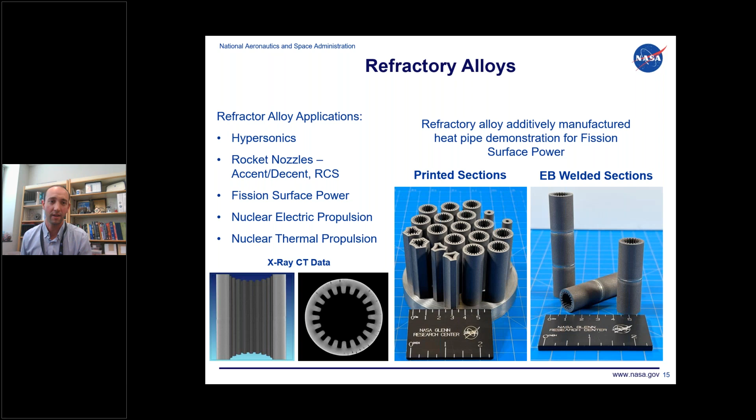I also want to touch on the fact that we're doing refractory alloy development here at NASA Glenn for a multitude of applications people are probably aware of: hypersonics, fusion, and fission power. We've started coating refractory alloys to explore the types of improvements in properties we might see. This is some early work my colleagues Justin Milner and Eric Brizes have been doing on C103 and ODS C103, and what they've found is that incorporating these dispersoids into C103 significantly improves its strength compared to non-ODS versions.

Lastly, I'd like to show that we were able to 3D print that original combustor dome that kicked off this whole project. We just finished the first series of hot fire tests on that part, and it did not fail the way other parts have failed, which was usually through catastrophic cracking. We're hoping to write that report up soon.

I'd be happy to answer any questions and discuss AM. Thank you.

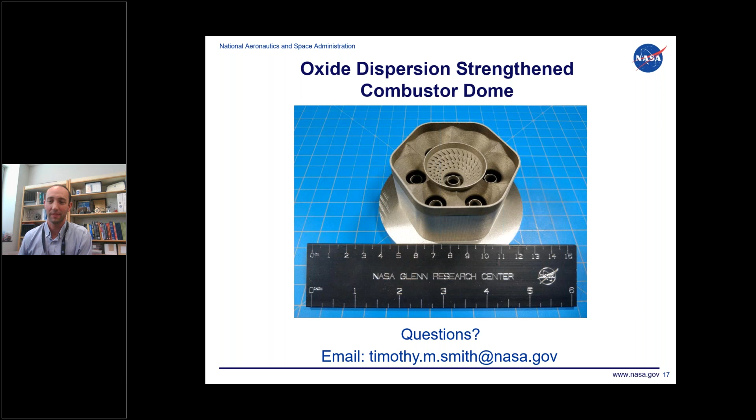To jump in with a first question, maybe for Jamie - there are questions about the environmental friendliness of powder production and that sort of thing. You addressed it briefly, but is there more you can say about that, or a place people can go to look up and learn more about the sustainability aspect?

Yeah, sure. So the full life cycle assessment that we did on typical powder processing is available on the 6K website. You can certainly reach out to any of us here to talk about it.

I think the part that life cycle assessment doesn't really take into account is that we try to team with folks in the additive manufacturing world. We know there are spent powders and waste streams that might be undesirable, and people don't always know how to get rid of them. So we partner with folks, look at what you produce, and figure out the best way to get the most environmentally friendly return, which generally comes with the most value too. Anything is better than putting it into landfill.